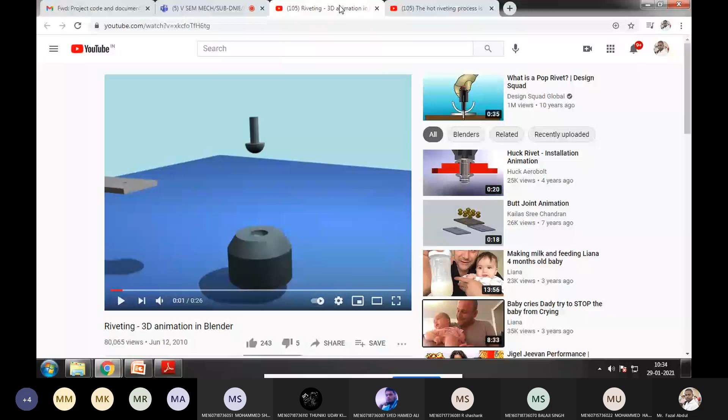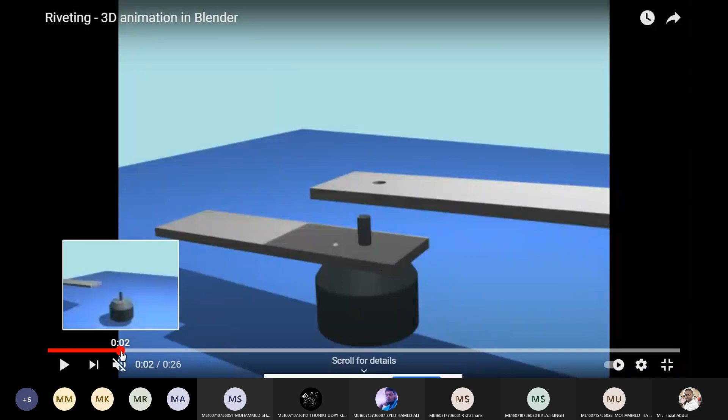So whenever we want to assemble two plates, before assembling we need to make a hole on the plates. Here in the first plate there is a hole, then in the second plate another hole is there. And with a tool, the hammer riveting is done here.

So this is one type of system for riveting, making a joint. And this is another type of joint, riveting only. This is the rivet staking. In this manner, the riveting is completing.

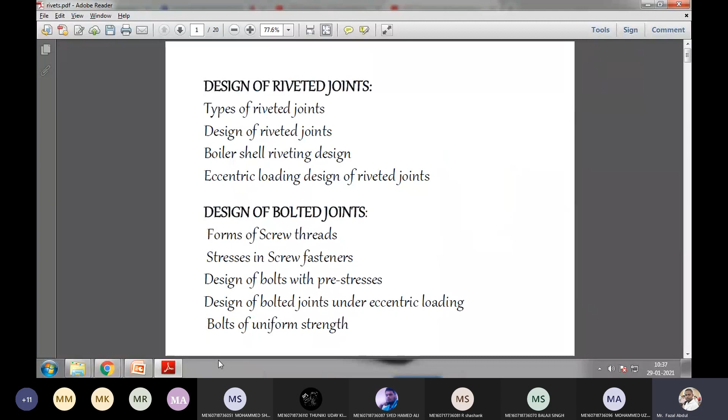So this is the process as shown, how the riveting is assembled to make two parts assemble, how the rivets are used.

So what is a rivet here? Before starting this, what is the rivet? A rivet is nothing but a short cylindrical piece with a head integral to it, as well as a tail integral to it. The middle portion is known as shank or body, the top one is the head, and the bottom one is the tail. These rivets are used for making permanent joints.

The rivets are used to make a permanent joint. So here is the process you have seen in the video: the die is kept below, and after inserting the rivet into the two plates with the die, the force is applied. So the riveting is done in this manner.

So the main function of the rivets is to make a tight and leak-proof joint, and the strength should also be there. To make a joint between two plates, like in construction works, structural work, shipbuilding, bridges, tank construction, boiler construction - in such situations, the riveting system is used.

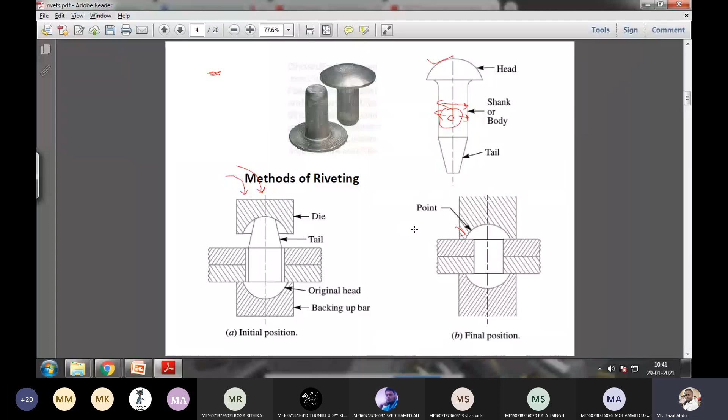So the rivet material, whatever we are using for the riveting joints, that material should have high toughness as well as ductility. These two properties are required for the rivet system. Generally, the materials used for rivets are low carbon steel, nickel, brass, aluminum, or copper. These are all the general materials preferred for manufacturing rivets.

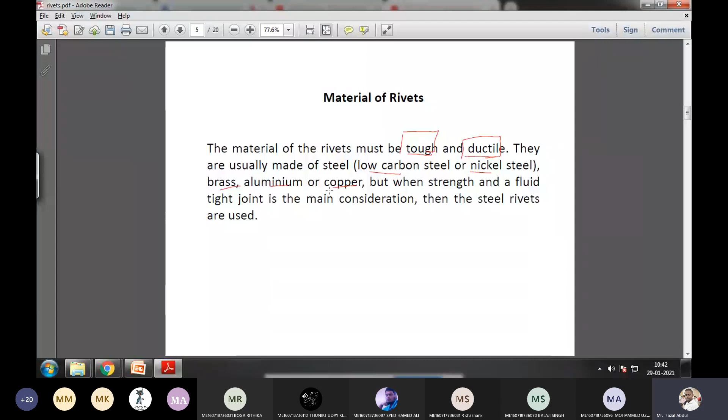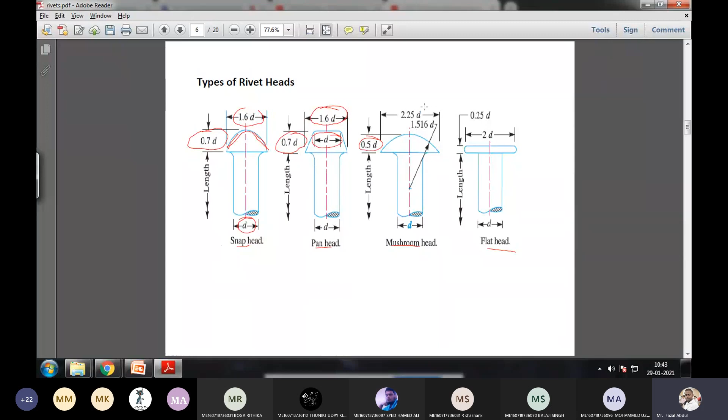And thickness of the head is 0.7 into d. In the same manner for the mushroom head, 0.5 into d is the height of the head, 2.25 is the outer diameter of the head, and the radius of the head is 1.516 into d. These relations we are going to use in some situations, not at all times. Just remember 0.7 into d and 1.6 into d. These two values are enough.

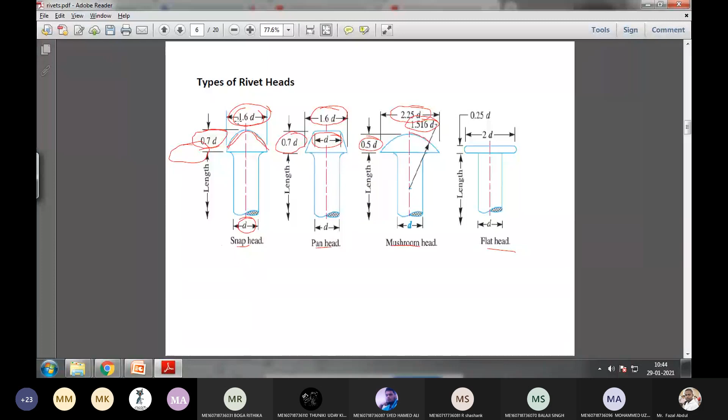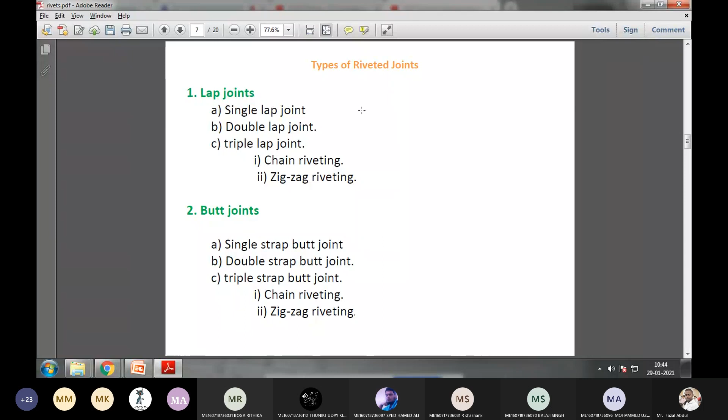So coming to the type of riveted joints. In the riveting system, the types of joints include single riveted lap joint. I think you already practiced these diagrams in machine drawing, so the rest are explained already.

Single riveted lap joint, double riveted lap joint, double riveted lap joint with zigzag riveting and chain riveting, and zigzag riveting. So broadly, this riveting system has one type which is a lap joint, and another which is a butt joint.

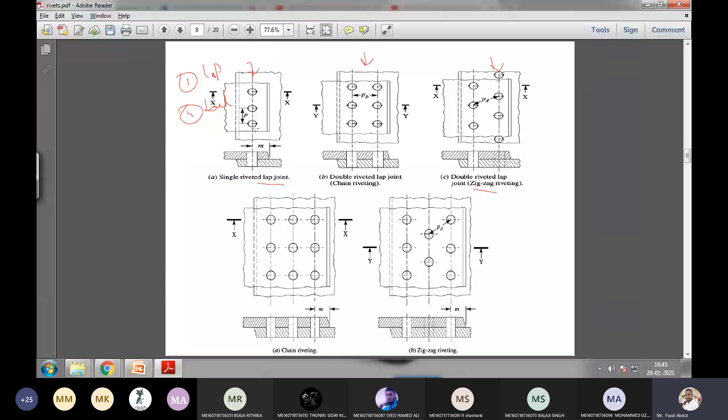Again, in lap joint, based on the riveting position, the system is going to differ. So single riveted lap joint means only a single column of rivets is appearing here. That is a single riveted lap joint.

If double columns appear, that is the double riveted lap joint, and it is also known as chain riveting, meaning continuously it appears in a continuous manner. Double riveted zigzag joint means the position of the rivets are arranged in a zigzag manner, like this.

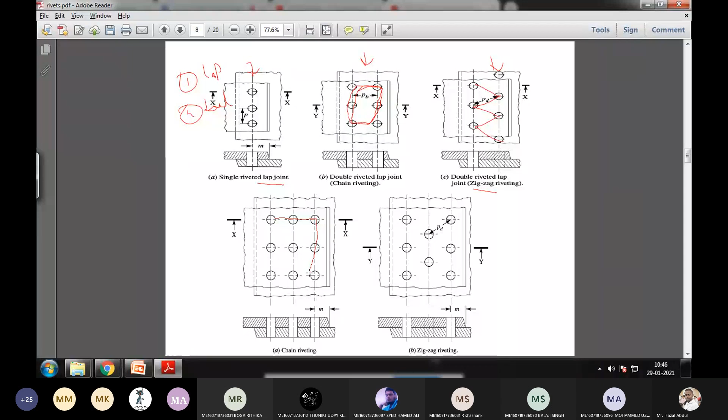Here it is arranged in a continuous chain manner. So this is the meaning of chain and zigzag.

Now if we see here for the lap joint, two plates overlap each other. This is one plate and this is another plate. One plate is placed over the other plate, and to match the two holes properly, then rivets are placed here.

So see here, from the front view only a single rivet is appearing. Actually, a number of rivets are there, but if you see from the front side, only the first rivet will appear here. Now if you see the front view, two rivets are appearing, so for that reason we call it double riveted.

Now if you see from here, only one rivet will appear, another rivet will not appear, but we are marking it with hashed lines. It means by seeing this figure, we have to estimate this is the zigzag riveting, this is the chain riveting. Okay, and now coming to the butt joint.

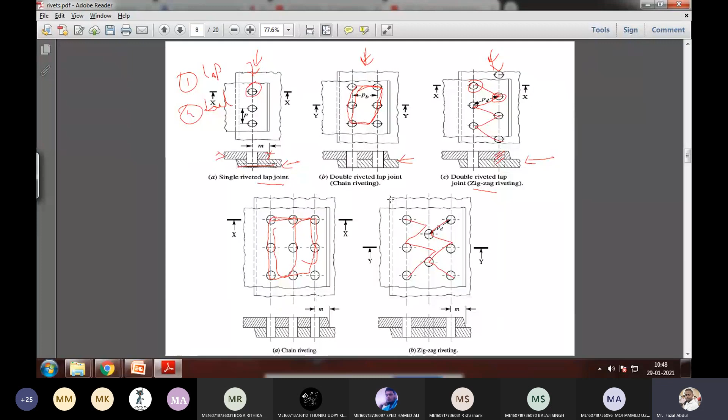Butt joint means two plates are joining here. See, this is one plate and this is another plate, placed in an adjacent manner, and on these two plates, two covers are going to be placed.

The butt joint may be single cover or double cover. If we place two covers, that is a double cover butt joint. If we place one cover at one side, that is known as a single cover butt joint. Here also we can find the single riveted joint and double riveted joint on one plate.

On one side of the plate, this is the first plate, this is the second plate. So on one plate, if we find only one column of riveting system, that is known as a single riveted butt joint.

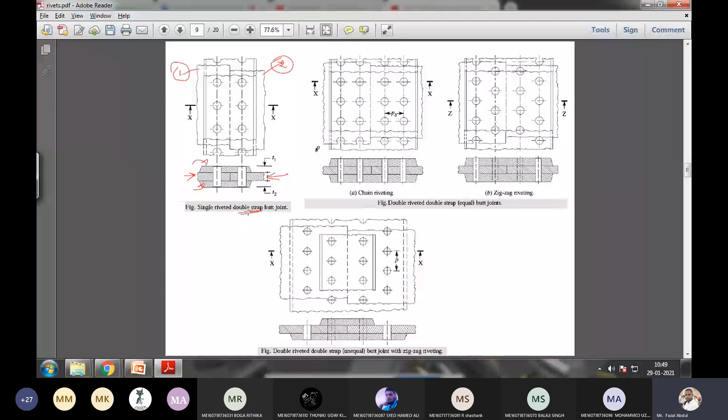Now based on the number of plates, the name is single riveted double strap butt joint, or double cover butt joint. If we use the single cover here, that is single riveted single strap butt joint.

And here, this is the first plate, this is the second plate. On one side of the plate, if you observe, two columns of riveting are appearing here - this is one column, this is another column. Now if you see the front view from this side, for one plate, two rivets are appearing here. So this is the double riveted double strap butt joint, or chain riveting - why I am calling it chain riveting...

Because this is in a chain manner, the arrangement of the rivets are in a chain manner. And here if you use a single strap, that is a single double riveted single strap butt joint.

Now this is the zigzag joint. The arrangement of the rivets are in a zigzag manner. So these are the types of joint in a riveting system: one is the lap joint, one is a butt joint, and based on the arrangement of the rivets, chain joint and zigzag joint. This is the classification of the rivets.

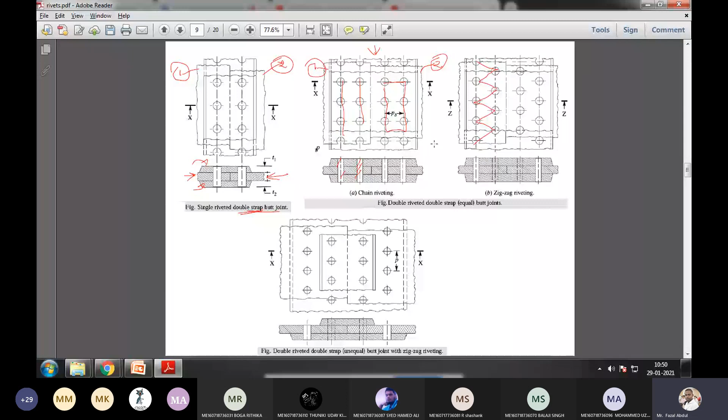Now these are a few terminologies we have to remember as per our syllabus. First one is pitch. Pitch is nothing but the center distance from one rivet to the next rivet. The center distance from here to here, that is known as a pitch.

It is denoted by capital P. Back pitch is nothing but the distance between one row of rivets to another, one column of rivets to another column of rivets. That is known as back pitch, denoted by P suffix B.

Diagonal pitch means the adjacent distance, this rivet to this rivet. So this rivet to this rivet, here the yellow color line appearing, that is a diagonal pitch. It is denoted by P suffix D.

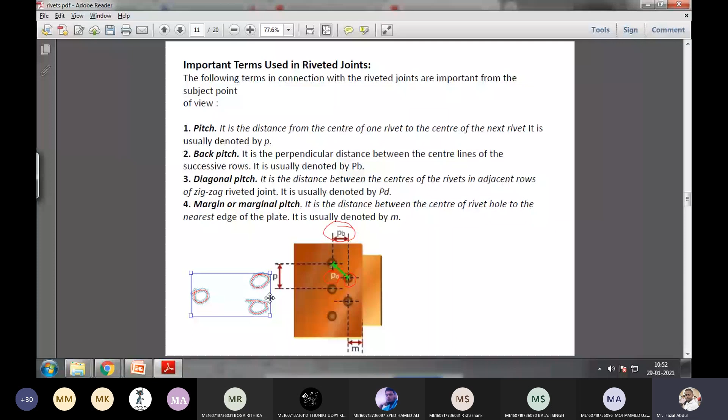So diagonal pitch we can find only in zigzag joint, not in a chain joint. In chain joint we can find the pitch value and the back pitch, but we cannot find the diagonal pitch.

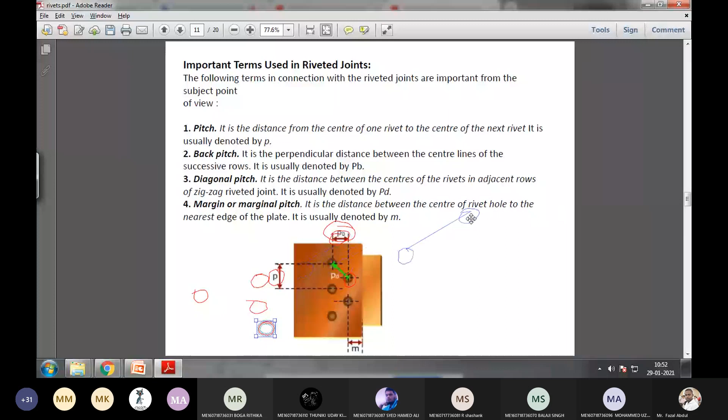Margin is nothing but the distance from the edge of the plate to the center of the riveting system. So edge of the plate to center of the riveting system, that is known as margin.

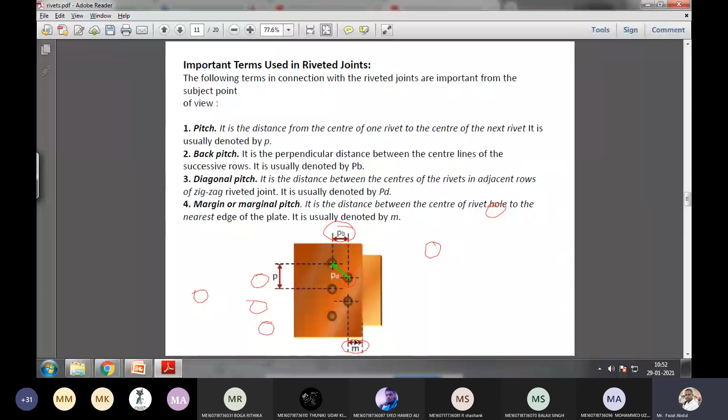So these are the four terminologies required as per our syllabus.

Now this is the caulking and fullering process. These two processes are used for making the joint leak proof. After making the riveting system, one tool is used, and based on the tool name, the process name is given: caulking tool and fullering tool.

So here its thickness is about 5 to 35 mm, and the angle from the bottom is maintained at 75 to 80 degrees. Here the angle is maintained at 80 degrees.

So after making the joint, this kind of tool is placed here and force is applied. What happens is it slightly moves in this manner, and by doing this, it makes a leak proof joint.

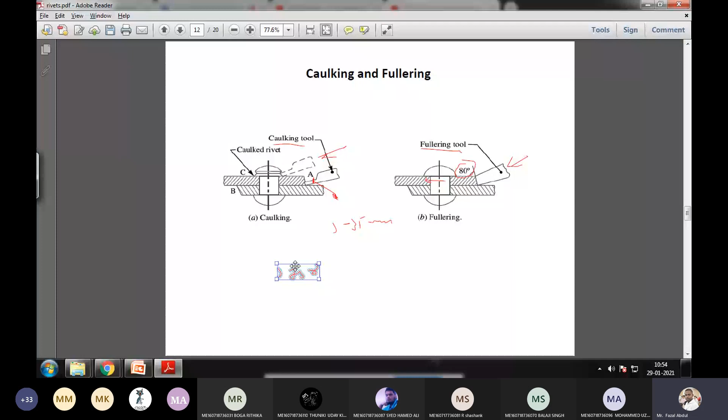So here, this is whatever so far I have explained, the terminology and theory. These are all the things we can expect for the 2 marks question. And now from this topic onwards, we can expect the long answer questions.

So here, design of riveting system is based on the failure modes of the rivets. It means if you know where the failure is happening, then when you overcome that failure, that is nothing but the design being done. If you know the failure modes, we can easily overcome that failure. That is nothing but what we are doing here in designing.

So for that, the failure modes are only here. Four types of failure modes we can find. First failure mode is tearing of the plate across the row of rivets. Second failure is shearing of the rivets. Third failure is crushing of the plate or rivets. Fourth one is tearing of the plate at edge position. So these four are the failure modes of the riveted joint.

So if we know the reason for each, and if we overcome these four failures, that completes the safe design. Now we are going to discuss these four one by one.

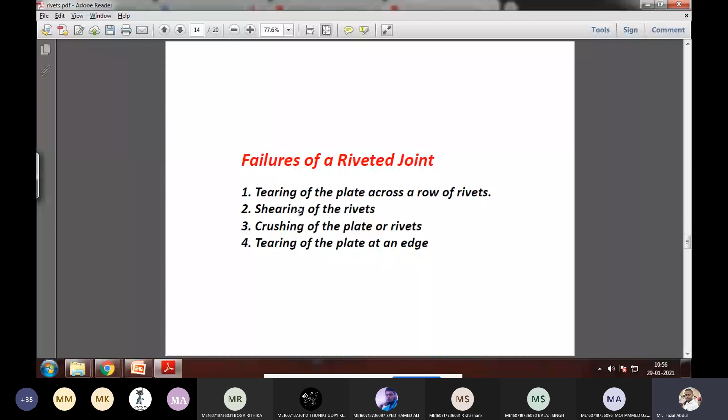The first one is the tearing of the plate across the row of rivets. So here, this type of failure occurs because continuous holes are made on a plate.

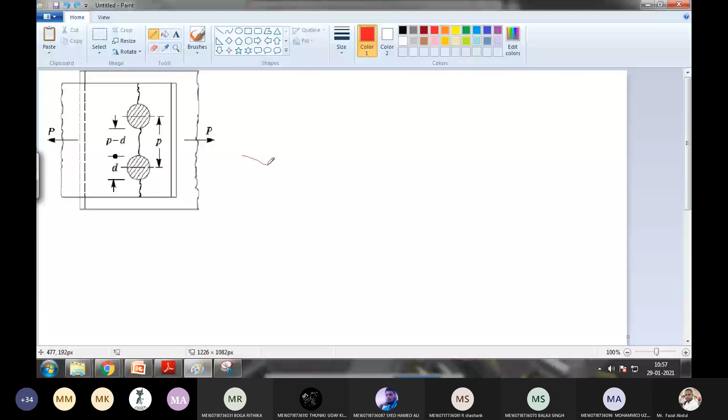Suppose this is a plate, having some thickness, length and width, that we want to join. So for this plate, if we make the holes continuously, through these holes only we are going to insert the rivets and do the riveting.

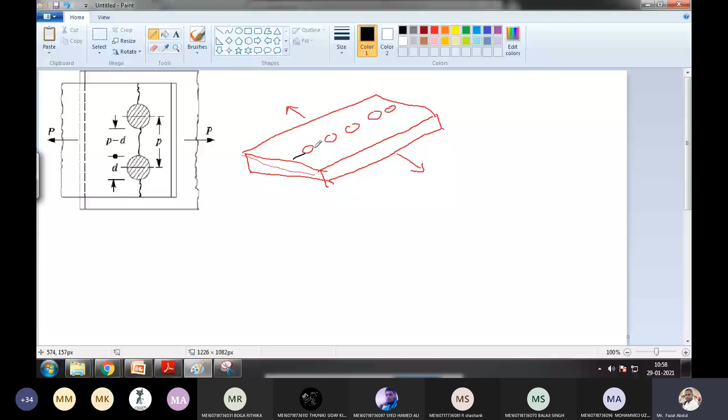So because of the application of load in this manner, and here applying the stress concentration phenomena, because a number of holes are presented here along this line, the stress concentration is going to occur. So at the edges of the hole, the stress is more.

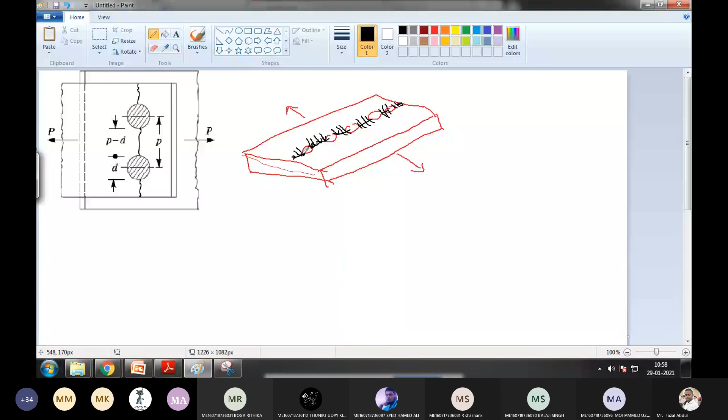Okay, so due to this reason, what happens? The plate is going to fail in a tear across the row of rivet. So that is the reason the name is given as tearing of the plate across the row of rivet.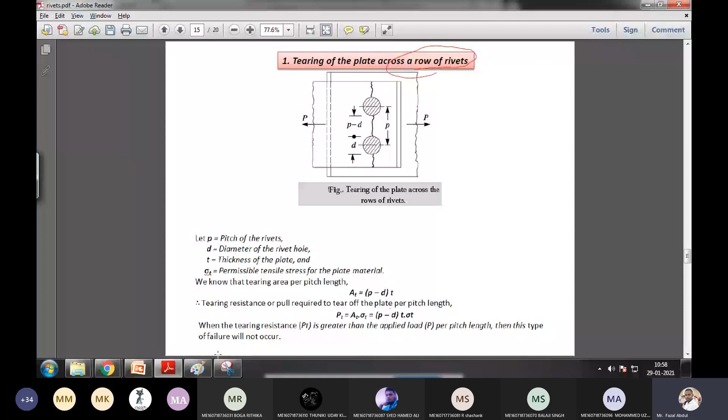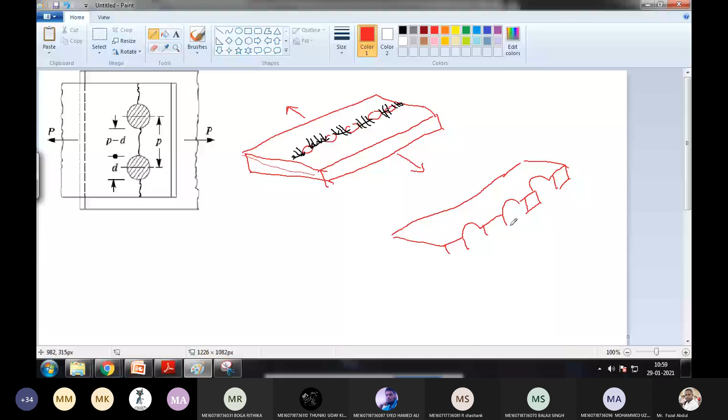So after failure, how it appears, I'm drawing here. Only one side figure I'm drawing. Because due to application of load, so only this part I am drawing here, first plate. Now what type of load applying here?

Tensile load applying, so tearing of the plate is happening here. So the respective stress is tensile stress. Tensile load by tensile failure area. So with this, tensile strength is equal to stress into failure area.

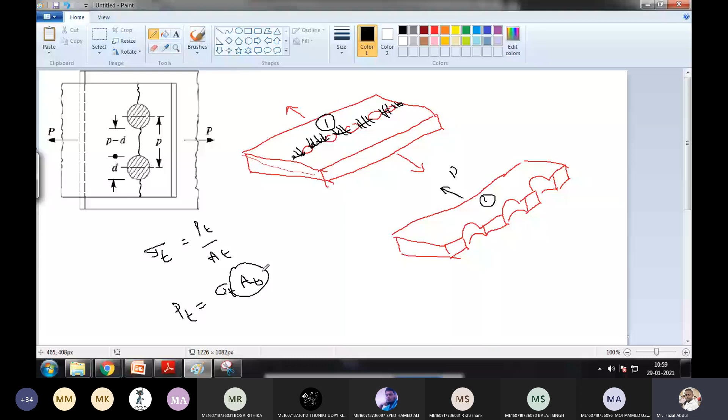Now what is the failure area here? This failure area we need to take into consideration. So this failure area, only one area I'm taking here. So this area I'm considering, only this particular area. So this area, how much?

This is the plate thickness T, and from this center to this center is known as pitch, isn't it? From this center to this center is known as pitch, and from this center to here is the diameter of the hole, from this center to this center, diameter of the hole. Okay, sorry, not diameter, radius of the hole.

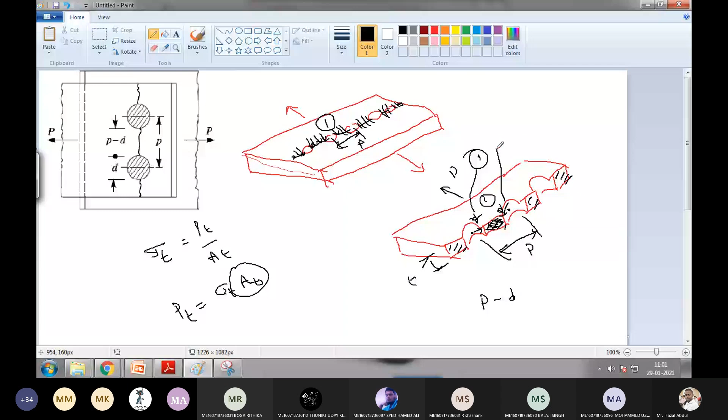So how can we get the area? From the pitch, if we subtract the d value, it means r plus r. This is one r, this is another r. So if you make 2r, that becomes d. So p minus d from the pitch. If you subtract the two r's, that is d, we will get the width of this one.

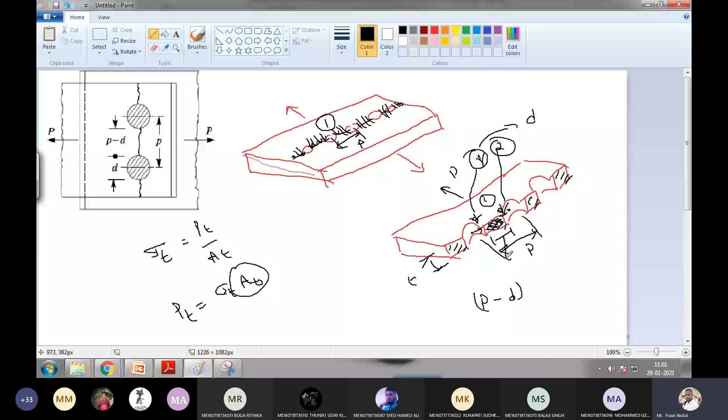Okay, now what is the thickness? Thickness is t. So write the equation here: Pt equal stress, tensile stress into p minus d into t. So this is the tensile strength for this tearing along the row of rivet. So with this, we are going to determine maybe the stress value, otherwise d value, otherwise pitch value, otherwise t value.

Okay, so with this we are getting the tensile strength of the riveting system when the plate is failing across the row of rivet. Means how much load we have to apply when such number of rows are present, number of rivets are present on the row. This is going to decide with this equation.

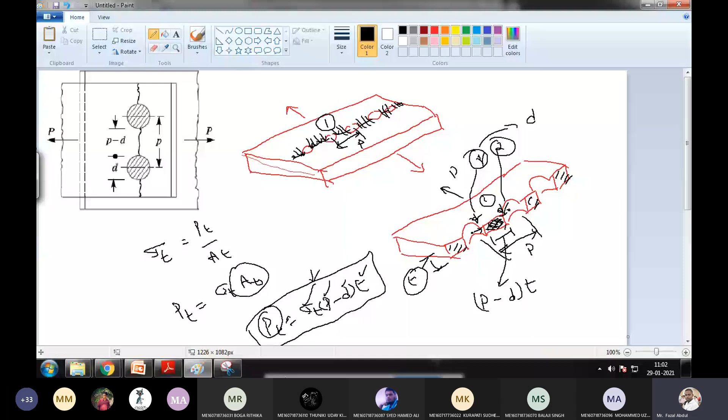That is the first one, first failure mode. So the second one is the shearing of the rivets.

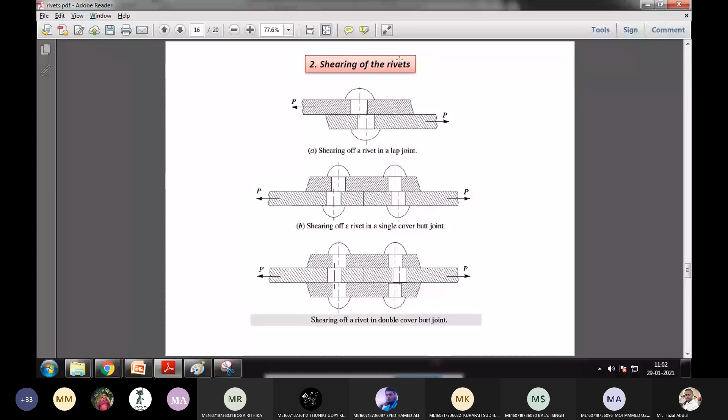Now shearing of the rivets, because see here, the shear failure we can expect in the lap joint as well as in a butt joint. So this is the lap joint, because here tangential forces are applying on the rivet.

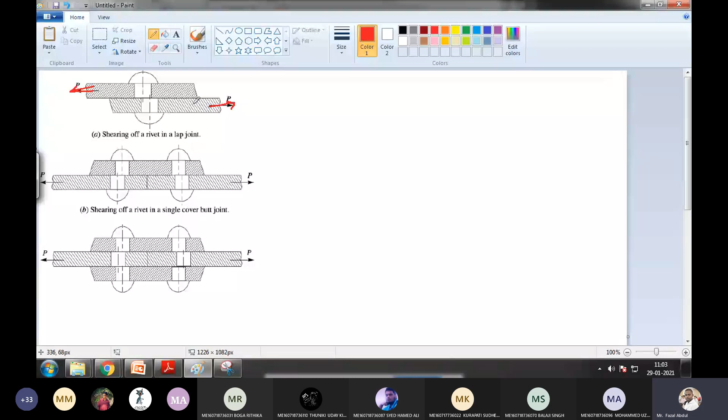The tangential forces are applying on the rivet because one force is applying on one plate, another force is applying on another plate. So because of this reason, the rivet is going to fail in this manner. Means one rivet is carried along this lower plate, another rivet is going to be carried along with the upper plate. Okay, now this is another type of figure.

This is the butt joint with single cover, single strap. So here the load is applying in a tensile manner because these two are collinear forces. But what happens, because of application of the one strap, the force is distributed in the rivet in a tangential manner.

In a tangential manner, because of that reason, the rivet is going to come along with this plate. This rivet is going to come outside along with this plate, and the top two rivets are going to remain inside the strap. Another figure you can see here, because of application of tangential force, the middle portion of the rivet is going to come outside, and the top and bottom rivets are going to stay in the cover plates.

Now see here, for this type of situation, I'm drawing separately.

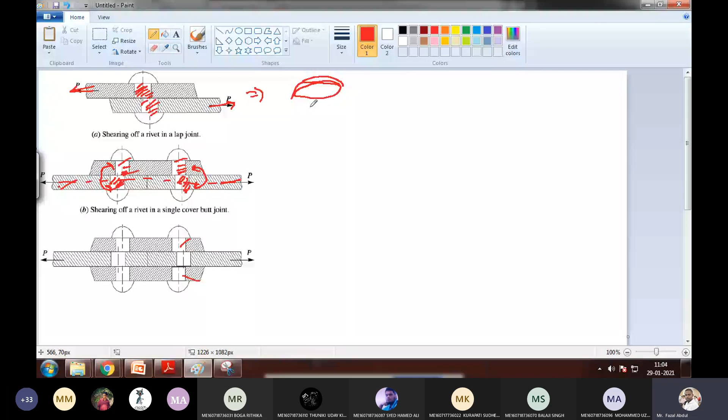I'm drawing separately. This is the upper failure and this is the lower failure for this one. Now for this, it is also same in this manner.

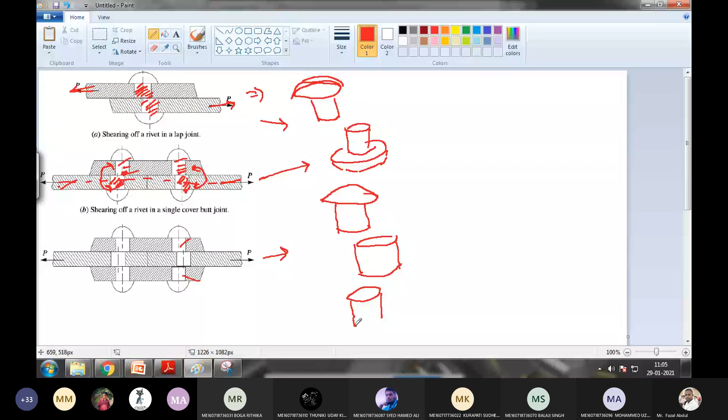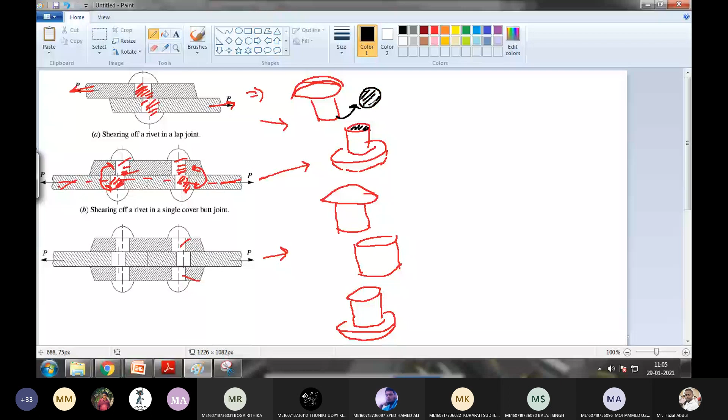Now this is the failure area. Another failure area is at the bottom. Now this is the failure area. Here at the bottom, we can find one failure area in a circular manner because the rivet is having a circular cross section. At this bottom also, we can find the failure area. Here another failure area.

Now the title is shearing off the rivet. So that is happening here, and that's the reason. The respective stress is: shear stress equals shear load by shear failure area. Now shear strength equals shear stress into shear failure area. Now this area is going to be different here.

If it is a lap joint, whatever we are applying here, single failure area we can find. It means the failure area here is pi by 4 into d square. So it means this one and this one become as one, that is pi by 4 into d square. Now, single strap butt joint.

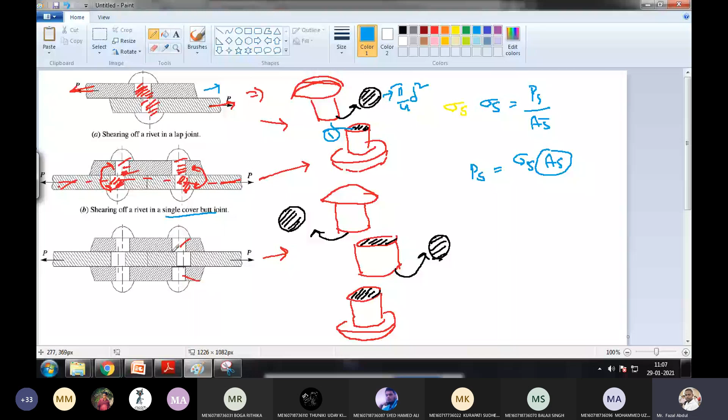The title here is single cover butt joint, so because of that reason, the failure also goes in this manner only. The equation for the failure area is pi by 4 into d square. Now this is the double strap butt joint. Double strap butt joint means two failure areas are generated, one at the top, one at the bottom. It means this one and this one combine as one, and this one and this one combine as one. Total two failure areas, meaning 2 into pi by 4 into d square.

So selection of area depends on the position. This is the first position, this is the second, and this is the third. It means lap joint means only single shear we can find. Single strap butt joint also gives single shear. Double strap butt joint means we can find two shear failure areas.

So PS equals sigma s into pi by 4 into d square. This is the lap joint equation. Now another equation is PS equals sigma s into 2 into pi by 4 into d square. This equation is for the butt joint. Why am I telling lap and butt joint? This is the lap joint, and this is the butt joint.

And this is also single strap butt joint, single strap butt joint. So why am I telling this one? Because in the lap joint and single cover butt joint, a single area is obtained. Here in the double strap butt joint, double area appears here. Here is one, here is one, here is one. So that's the reason I am multiplying with 2.

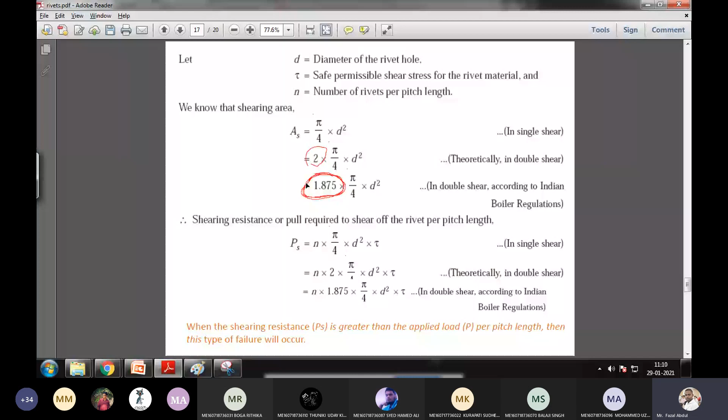And one more thing: this is for only one rivet from the front view. If you see from the top side, there are n number of rivets present, so n number of rivets means n number of failures we can find, so that reason we multiply with n here. And here also, this is a front view figure, so if you see from the top side, a number of rivets are present, so n number present means we have to multiply with the n value here. So the equations slightly change here, multiply with n.

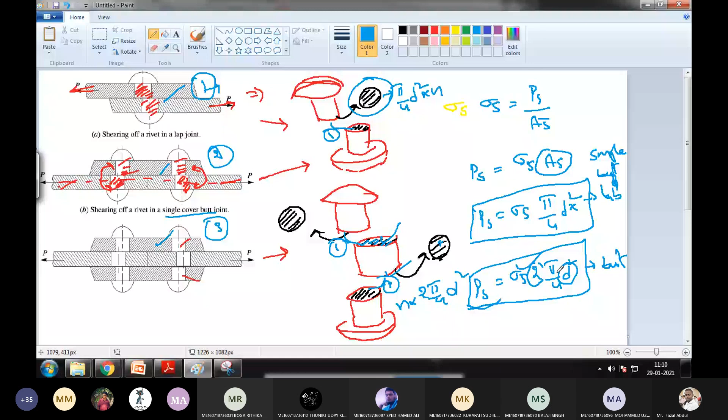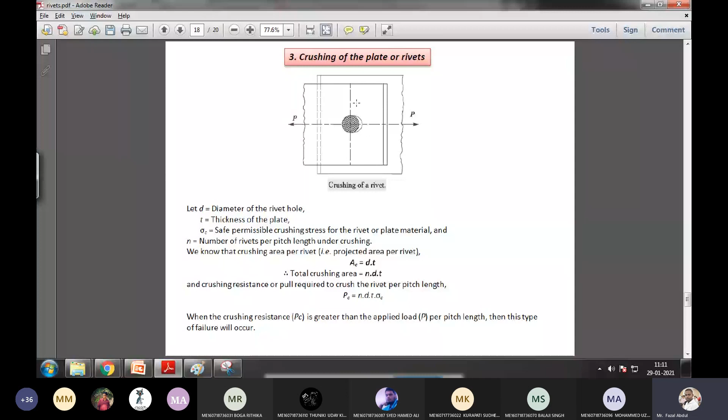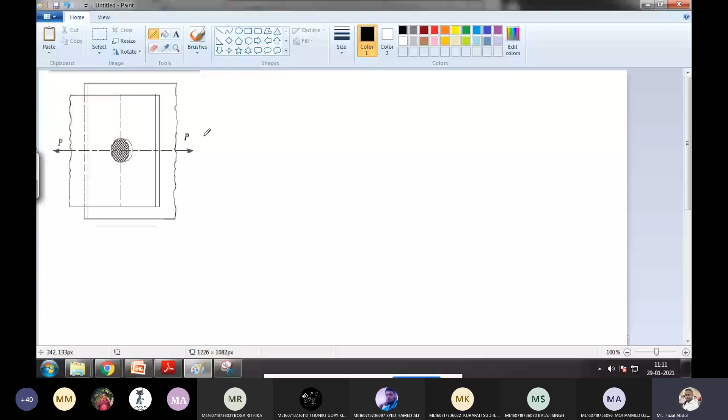Now the third failure is crushing of the plate or rivet. Crushing of the rivet or plate means when there is a looseness in a joint. When there is looseness in a joint, it means the diameter of the hole is larger than the diameter of the rivet. So what happens is, because the diameter of the hole is larger than the diameter of the rivet, looseness is created. Because of this looseness, whenever the load is applied, vibrations are generated, and this rivet goes and hits the surfaces of the plates.

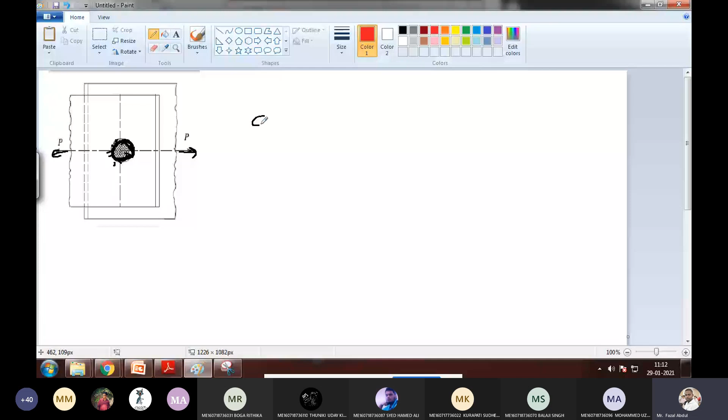So because of that, the circular hole goes on to create an elliptical shape. Elliptical manner means whatever dark line I'm drawing here, that area is going to be subject to crushing. So the respective stress is: crushing stress equals load by area. So crushing strength equals crushing stress into crushing area. So what is the area here? The area is along the diameter into along the thickness of the plate. I'm drawing it separately here.

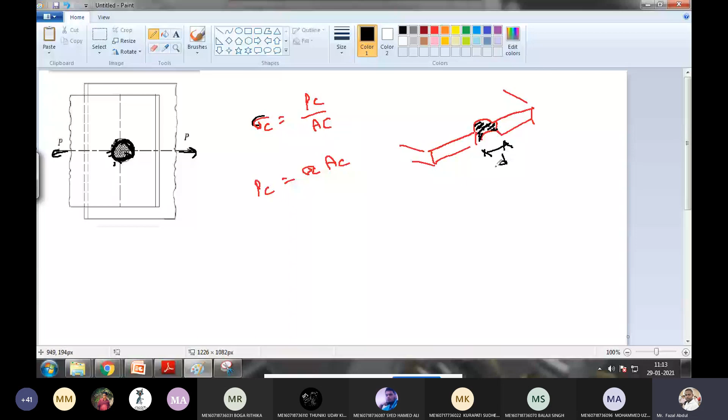So in this region, it is going to be subject to crushing. How much is this one? This is D, and how much is its thickness? This is T. The crushed area is D into T. In a single plate, the number of rivets equals the number of holes. How many rivets are there? We don't know, so that is n number. So PC equals sigma C into n into D into T. This is the crushing strength of the rivet system.

Now the fourth failure is tearing of the plate at the edge of the rivet. This failure happens because we are making the holes in the plate near the edges. So when you apply the load here, the rivet easily comes outside, and the failure appears in this manner.

To avoid this failure, we have to maintain the proper margin. Margin M equals 1.5 into D. So these are the failure modes of the rivet.

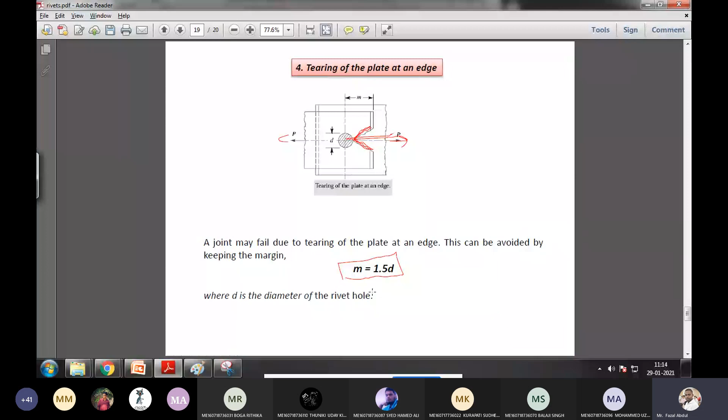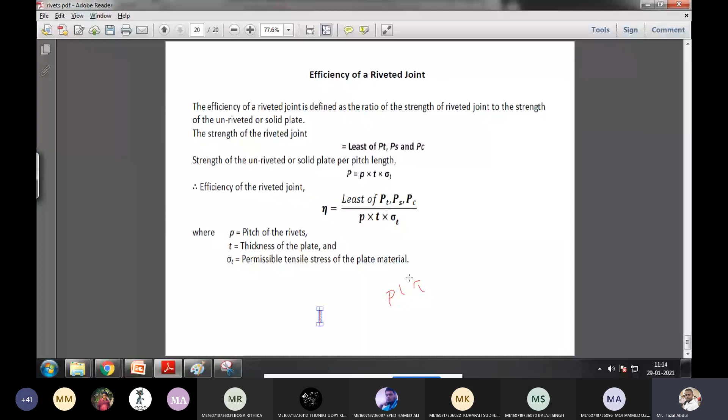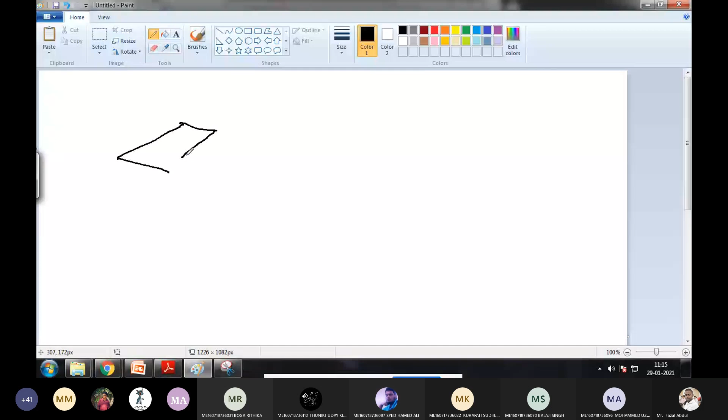Next is the strength of the riveted joint, which is given by one relation: strength of the un-riveted or solid plate equals pitch into T into sigma T. It means, suppose this is the solid plate, and we are applying the load P here, sorry, tensile load.

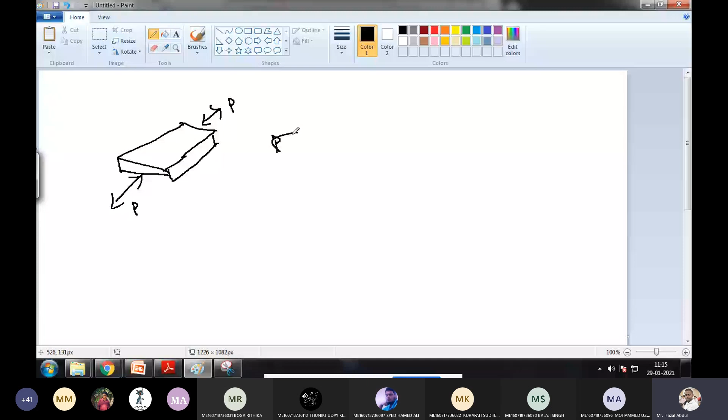So how much tensile stress is generating here? That is tensile load by tensile area. So PT equals stress into area. How much area is here? We don't know the area here, so for that reason, along this line, we are placing the rivets.

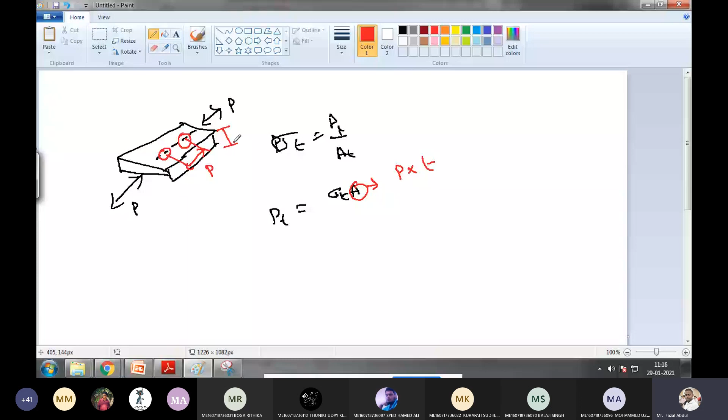So here one plate, here one rivet, here another rivet. Suppose we want to make it. So how much distance do we place, at which distance do we place? The area we can expect is along this pitch only. So the area you can find is pitch into T, where T is the thickness. Now tensile strength of the plate is P into T into sigma T. This is the strength of the solid plate.

If we make a hole, the equation changes as PT equals P minus D into T into sigma T. This is tearing of the plate along the row of rivet. If we are not making any holes, just planning, that is the strength of the solid plate.

Now the efficiency of the riveted joint is the least of PT, PC, or PS divided by the strength of the solid plate. PT we calculated at the beginning in the topic tearing of the plate along the row of rivet. And the shearing of the rivet, we calculated the shear strength of the rivet. And crushing strength, we calculated crushing of the plate or rivet, the PC value. Among these three values, the least value we have to select. The title itself tells us: in efficiency, the least value is selected, whichever is least. And P here is calculated from the strength of the solid plate.

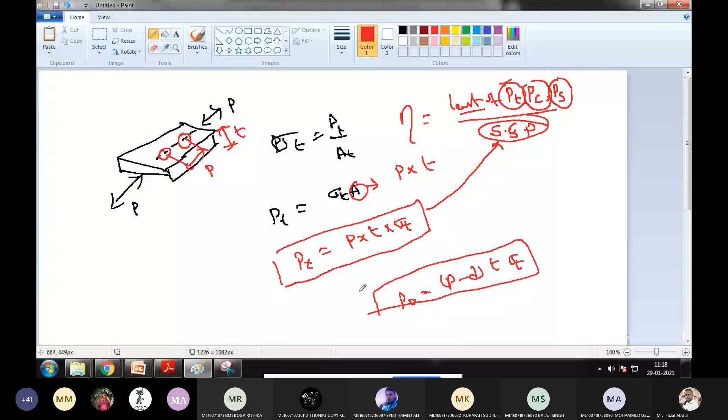Is there any doubts regarding this topic, failure modes of the rivets? Don't have any doubts?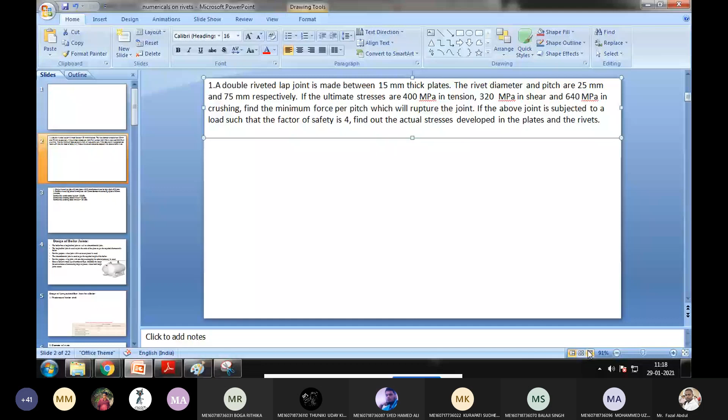Now, so this is the one problem. How much time now? 11:20. Okay, see the given data. Read the question properly. A double riveted lap joint.

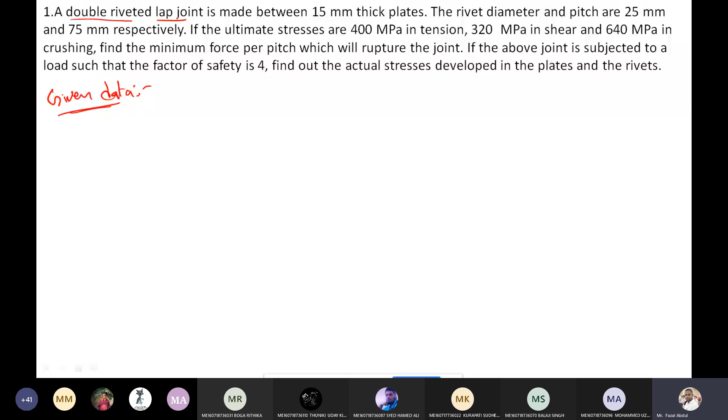For this riveted joint also, you have to draw diagrams every time in numerical problems. If you forget to draw the diagrams, you will lose the marks. So double riveted lap joint means this is the plate, and another plate is below this one. That's the reason I'm drawing the hashed lines. You have to draw it in this manner only in the examination.

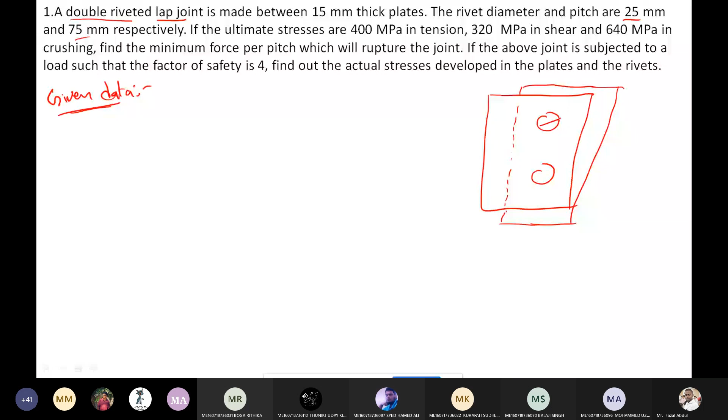Double riveted lap joint made between 15 thickness plates. Rivet diameter and pitch are 25 diameter, 75 pitch. So 25 diameter, pitch is 75. Plate thickness is... so I am drawing from the front view.

Plate thickness is 15. Ultimate stresses are given. Sigma T value is given as 400 megapascal, 320 megapascal for shear, and 640 megapascal for crushing.

Find the minimum force. The question is asking how much P value, minimum force required per pitch will rupture the joint, if the above joint is subjected to load such that the factor of safety is 4.

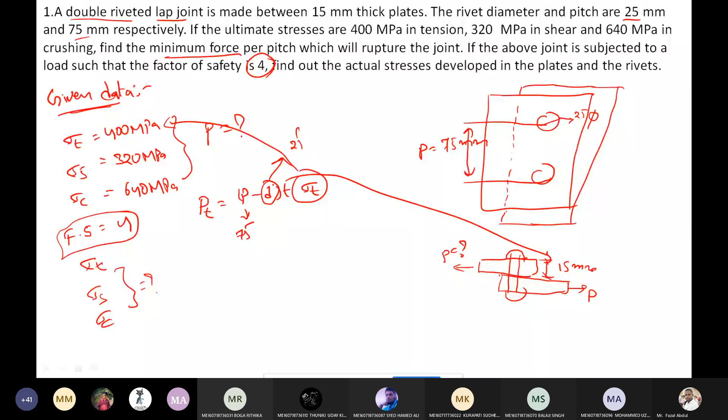In the same manner, Ps equals sigma s into n into pi by 4 into d square. n is the number of rivets, how many double riveted. So here double, I am writing 2. So Ps equals sigma s value given as 320 into double into...

Why am I taking pi by 4 into d square? Because single shear appears here, as this is a lap joint. Only single shear appears in this region. In this region, single shear appears. So pi by 4 into d square, that is 25 square.

With this, PS you calculate in terms of Newton. Now PC equals sigma C into N into D into T. N is 2 here, sigma C is 640, D is 25, and T is 15. Substitute all the values here, and you will get PC value in terms of Newtons.

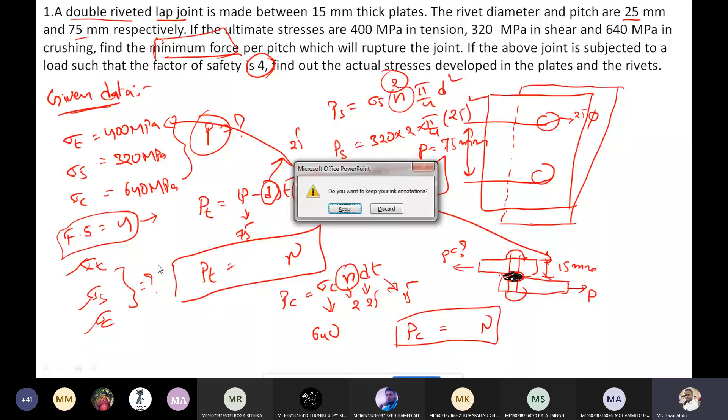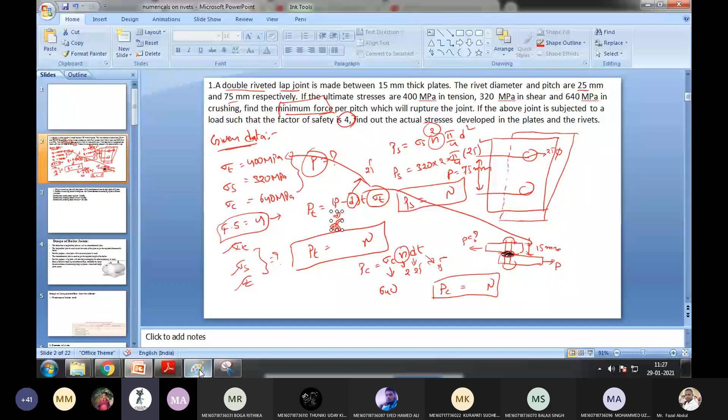Okay, roll number 70 given. 1, 2, 3, 4, 5. Which one, Babu? This one you gave? PT value, sir, PT value. Okay, yes sir.